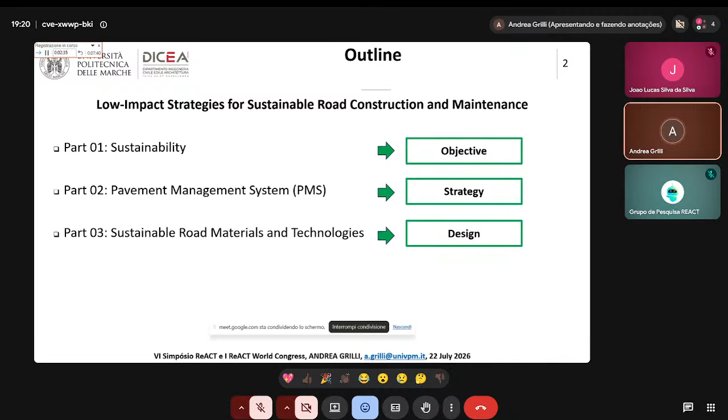Management system is the container, and sustainable materials and technologies are the tools inside the container.

So let's start from part one on sustainability. I will introduce the general context, then move to guiding principles. We will talk about sustainability from the definition to limits, dimension, culture, the ONU Agenda 2030, which contains the most important concepts for human beings and for our planet.

Afterward, we will see policy frameworks and procurement, talking about the Paris Agreement in 2015, and then in detail what is going on in Europe, in Italy, as a case study, because that is the situation I know best.

Before addressing sustainability in road materials, we should acknowledge that complex problems rarely have a simple solution. Apparent simplicity is often the result of an incomplete understanding of the variables, the interaction constraints, the long-term consequences. Simplified and easy solutions can be misleading, especially when they ignore the structure and dynamics of the system. Therefore, our goal is to understand the complex situation to make responsible and technically good decisions.

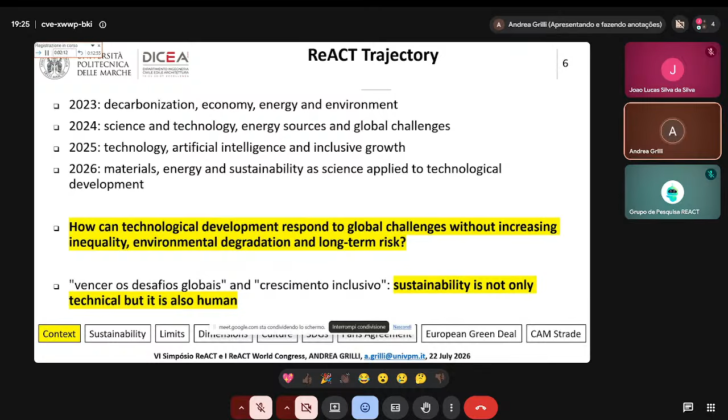Considering a more technical approach, we can update this definition, and I will formulate it in this way: sustainability is the ability to make progress last without exporting unacceptable ecological and social costs to the future, to other places, and to more vulnerable people.

We must realize that nature is a system of interconnected components and cycles. They are in equilibrium, but just a small change can produce strong responses, and we cannot disturb this equilibrium. So human activities take place within biophysical boundaries that control climate stability, biodiversity, land use, water, and air quality. The scientific evidence shows us that human development is pressing against ecological and climatic limits.

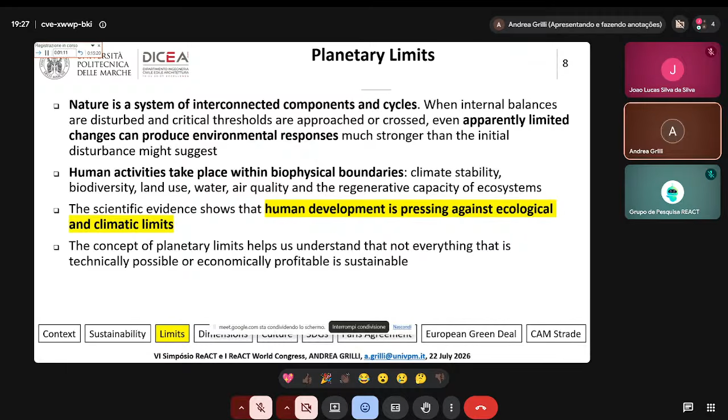From here, the concept of planetary limits helps us understand that not everything that is technically possible or economically profitable is also sustainable.

Traditionally, we often describe sustainability through three dimensions: environment, society, and economy. The environmental dimension defines the limits within which human activity must operate. The social dimension reminds us that development must serve people, improve quality of life, reduce vulnerability, and promote inclusion. The economic dimension is essential and means using resources efficiently over time and avoiding the transfer of hidden costs to the future.

Therefore, sustainability is a decision framework with three main pillars. Sustainability can write the criteria to select specific projects and research.

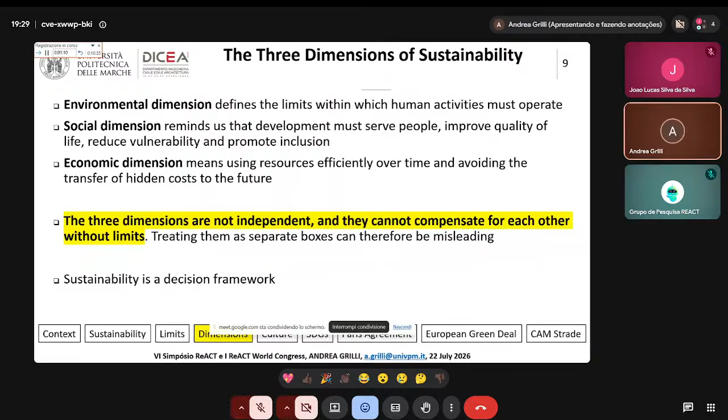We can also try to understand the relationship between sustainability, society, and economy. They can be organized in different ways. We can distinguish two different main logics. The first: the economy drives sustainability. A low impact solution spreads when it becomes profitable, efficient, and competitive.

In the second, sustainability guides the economy. An informed society defines an environmental objective and then uses regulation, procurement, and economic instruments to make that objective viable in the market. This is why sustainability is also a cultural and educational issue. Only a society, and the society I include engineer, designer, student, researcher, industry, only a society able to understand long-term consequences can orient economic tools toward public value.

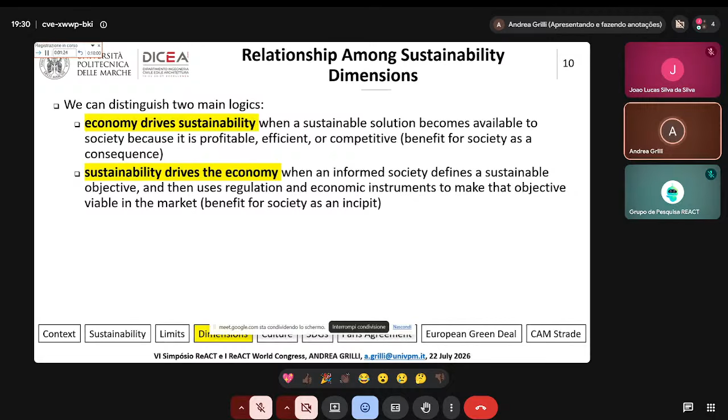Sustainability as culture and education. Technology is necessary, of course, but it is not enough. A society does not become sustainable simply by adopting more efficient machines or new materials. A society becomes sustainable when people understand sustainability as a shared responsibility, when designers, companies, and universities are expected to consider the long-term consequences of their decisions over time, across territories, and for people.

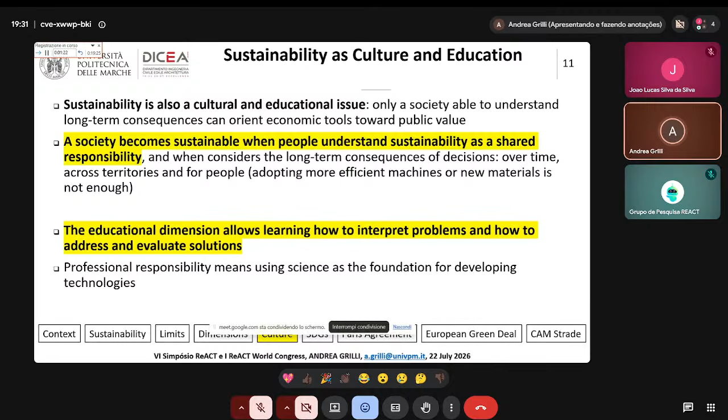This education dimension is especially important in this context, in a congress like ReACT, because many participants are students and young researchers. We are not only learning techniques, we are learning how to interpret problems and how to address and evaluate solutions. We are learning what kind of professional responsibility belongs to science and technology.

In this context, we can talk about the United Nations Sustainable Development Goals. The development goals, adopted in 2015, provide a universal and integrated framework for strategic and political planning. They bring together the economic, social, and environmental dimensions of development, and they offer a common language for governments, institutions, companies, and society.

Really, this process started in 1992 with the Earth Summit in Rio de Janeiro, Brazil. The 2030 UN agenda influences national policies because it provides a common language, a structure of goals, a system of indicators, and a mechanism for international reporting. However, the sustainability development goals do not define technical standards, so they are not mandatory. They give us the direction.

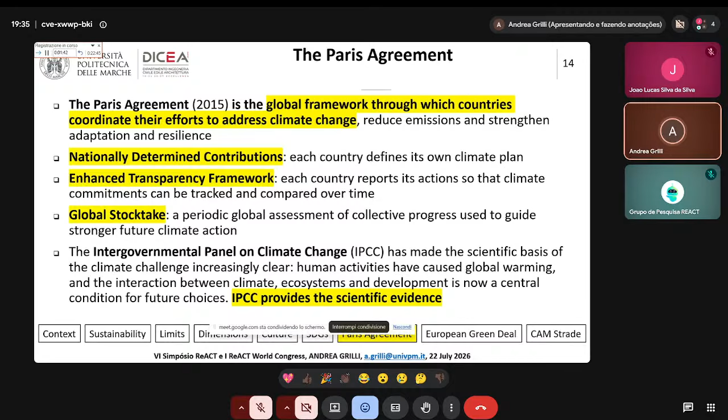Let me now move from the global framework to the European interpretation, because it is a useful example of how sustainability is moving from principle to procedure. The European Green Deal defines sustainability as a new growth strategy, an economy that is modern, resource efficient, with no net greenhouse gas emissions by 2050. The European Climate Law makes climate neutrality a binding objective for the European Union and for the member states. Sustainability becomes, therefore, part of how infrastructure is selected, financed, and evaluated.

In Italy, one example of this operational shift is represented by the Italian minimum environmental criteria on road infrastructure. We call it 'criteri ambientali minimi strade', the Italian minimum environmental criteria for road infrastructure. This is the implementation of the European Green Deal in Italy, and this regulation transforms principle into practice.

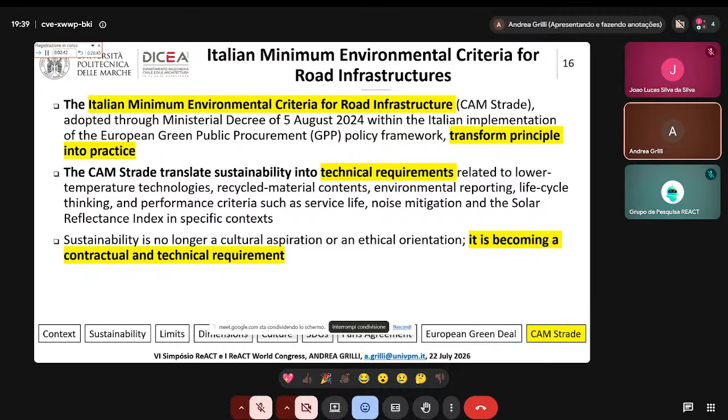About the recycled material, in the past we had a maximum amount to respect, so the regulation told us no more than, for instance, 20% of recycled material. Nowadays, with the CAM strade, the Italian minimum environmental criteria, the regulation is exactly the opposite: the asphalt concrete must contain at least a certain amount of recycled material, for instance 15% for the wearing course, 25% for the binder course, and 35% for the base course. So the approach is completely changed.

However, our work is not yet complete. I think we are on the good way, but our work is not yet complete, as several aspects still require further consolidation before they become common practice. We need to wait a gradual transition because the road industry sometimes adopts a conservative approach. We still need technical specification and design procedures that can fit better to the new material and to the sustainability concept.

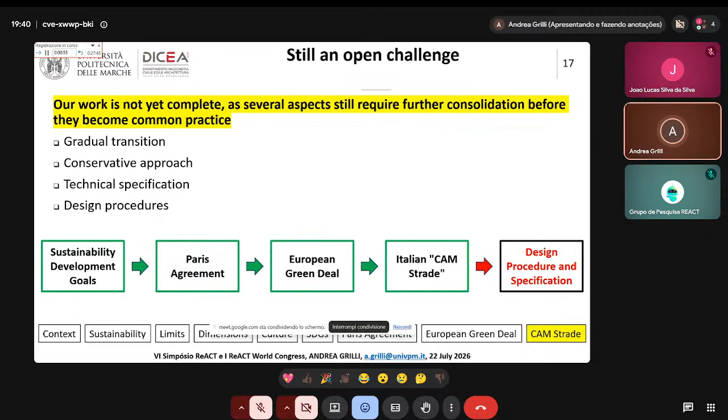However, we are on the good path. The conclusion of this first part: sustainability is a decision framework that helps us decide which alternative provides the best balance between technical performance, environmental impact, cost, and social benefits in the short and long term.

In general, the Sustainable Development Goals provide the development compass. The Paris Agreement provides the climate commitment. The Intergovernmental Panel on Climate Change provides the scientific evidence, and national laws, design procedures, and specifications must transform this principle into action.

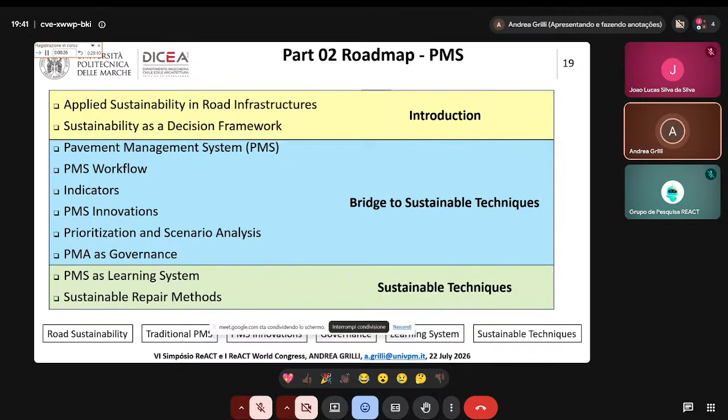So we can move right now to the second part of my lecture. Now we are going to transfer the general concept about sustainability into the infrastructure context. We will talk about technical tools to manage decisions for road pavement, which is the bridge to the application of sustainable techniques.

According to the IPCC, greenhouse gas emissions increased by 70% between 1970 and 2004. The average annual emission in 2010-2019 was higher than in any previous decade, and transport is one of the major contributors to climate change.

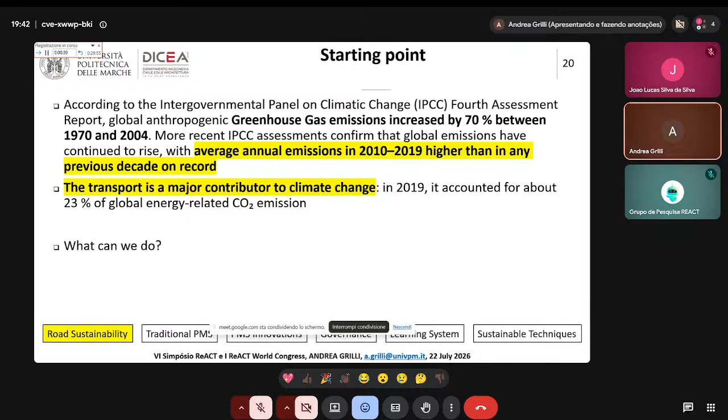So what can we do? Road consists of material, building, requires energy, transports people, connects people. They are part of the territory and they are expected to last. Therefore, road infrastructure is one of the most concrete places where material, energy, and sustainability are tested every day.

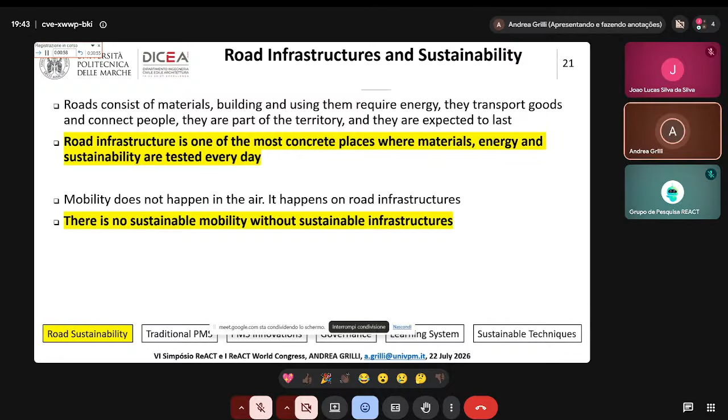Generally, we talk about sustainable mobility. We associate it mainly with vehicles, electric cars, alternative fuel, transportation. However, mobility does not happen in the air, it happens on infrastructure. Therefore, there cannot be sustainable mobility without sustainable infrastructure.

For asphalt pavements, sustainability should be interpreted as a measurable balance between performance and impact along the service life. So, performance and impact along the service life. We need a system that makes sustainability continuous, measurable, and operational. We have to transform sustainability from the general principle into a continuous practice of infrastructure management.

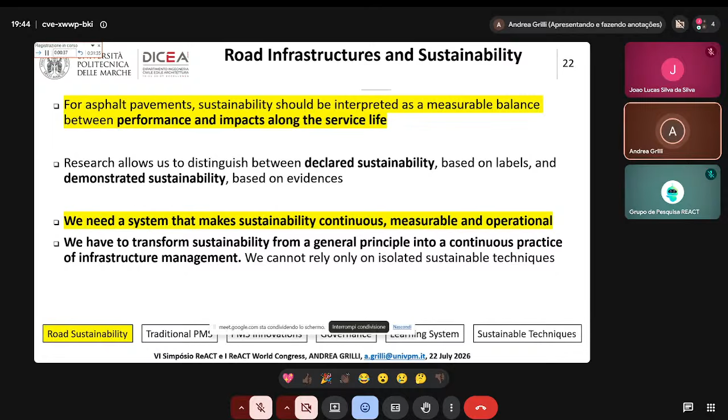Technology must be inserted into a broader strategy, because they become truly transformative only when they are embedded in a decision system. So technology should not be interpreted as an isolated solution. And I invite you, do not think in terms of one-to-one substitution in a project, as sustainability does not mean replacing a traditional technology with a sustainable one, or at least is not only that, it is changing the design approach.

So for this reason, I can explain the title of this lecture. Low impact strategy means a coordinated set of choices to reduce the overall impact of infrastructure. Sustainable road construction includes materials, of course, but also service life, and therefore the future impacts are already decided during the construction. And then maintenance. Maintenance is the way sustainability is preserved over time.

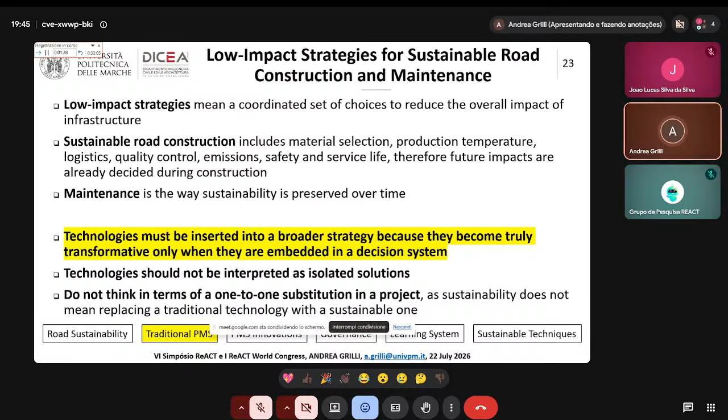A pavement management system is really a container of a set of tools, technology, and methods, and the management system can assist decision makers in finding the optimal strategy for maintaining pavement in a good service condition over a given period.

The most important word is system. System means a rational connection of coherent actions, data flows, responsibilities, and decisions. So management of a road network is not only maintenance, it is creating a system.

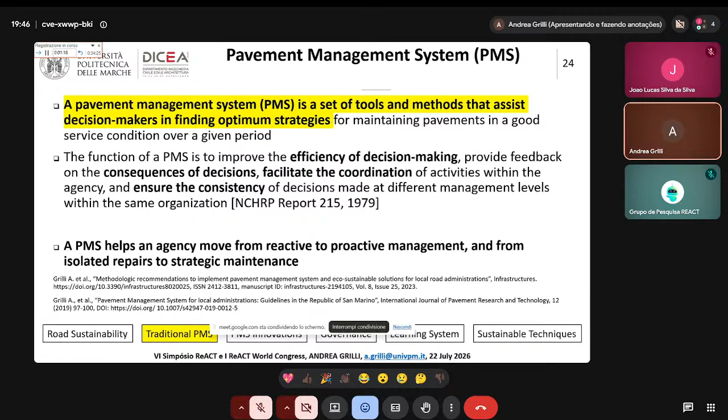A PMS, pavement management system, helps the road agency move from reactive to proactive management and from isolated repairs to strategic maintenance.

How can we demonstrate that a pavement management system is useful? I tell you, a pavement management system is useful because it helps answer the fundamental question on pavement management. So why should we prefer a specific strategy? The objective must be explicit.

So the motivation: when should maintenance be performed? The right time is very important. The right time is when maintenance produces the highest value or keeps the highest value over time. So that leads us to think about reactive and proactive approaches.

Where should maintenance be performed? The worst pavement is not automatically the first priority. It depends on several parameters, for instance the traffic volume. Therefore, priority: the agency must fix the criteria to identify the priorities in the road network. And then the road agency can also evaluate several different scenarios and decide the best one.

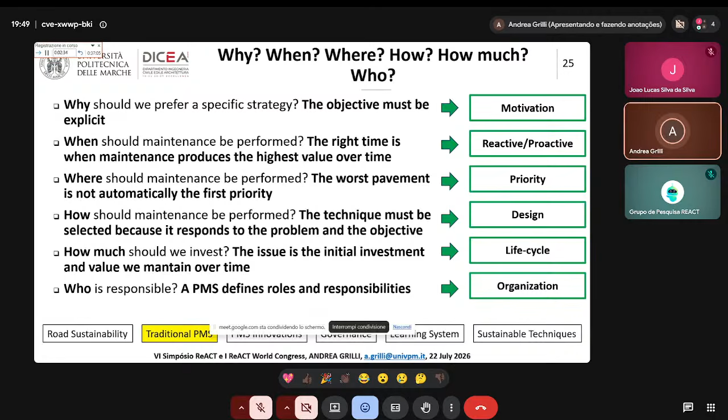The pavement management system workflow didn't change over time, is stable over time. So there are several functional phases: gather information, define the priorities, select the type of maintenance, elaborate the maintenance planning, and then the application. And then once again, we can get new data and implement the informative database.

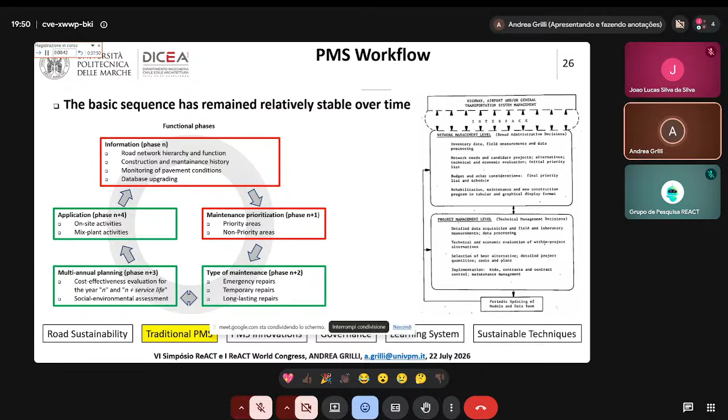The PMS works in two levels. The network level is where key administrative decisions influencing the overall road network are made, and the project level is where technical decisions are made for a specific area. The two levels must communicate because a project is one decision inside a network strategy.

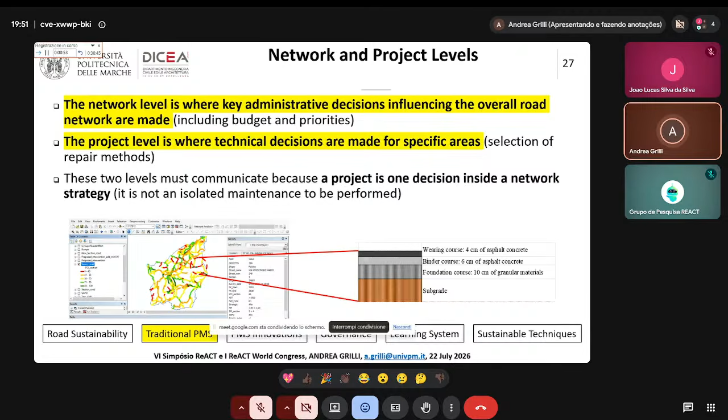And in this figure, you can see just an example. On the left, the condition of the network. On the right, a specific design for a specific road inside the network. Particularly, this is the network of the Republic of San Marino.

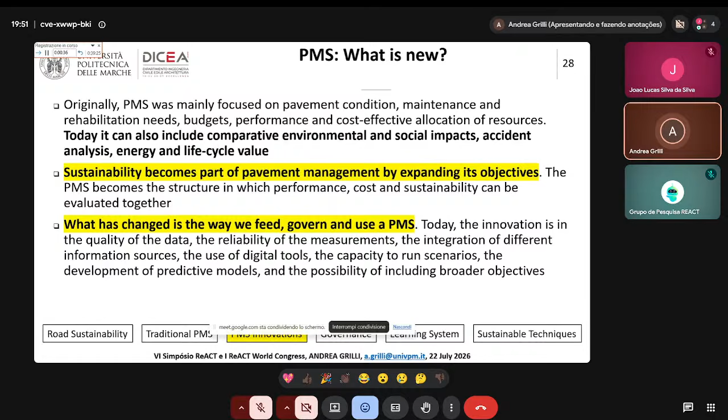Originally, pavement management system was mainly focused on pavement condition, maintenance, budget. Today, it can also include comparative environmental social impact, accident analysis, energy life cycle value. Therefore, sustainability becomes part of the pavement management by expanding its objective. What has changed is the way we feed, govern, and use the pavement management system.

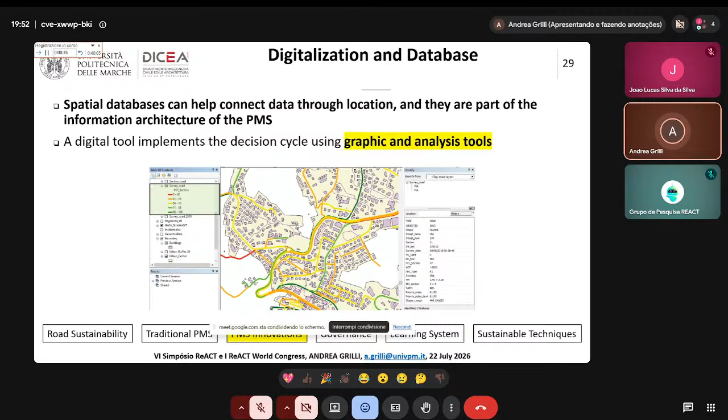Spatial databases can help connect data through location, and they are part of the information architecture of the pavement management system. The digital tool implements this decision cycle using graphic and analysis tools. The graphical tools help us to understand, to explain some specific strategies and decisions.

The best PMS is the one that the agency can maintain, update, and use year after year. Of course, a motorway agency can use a more sophisticated management system. However, also a local agency must use a pavement management system to organize their activity. They just must use a tailored management system, but they must use a system.

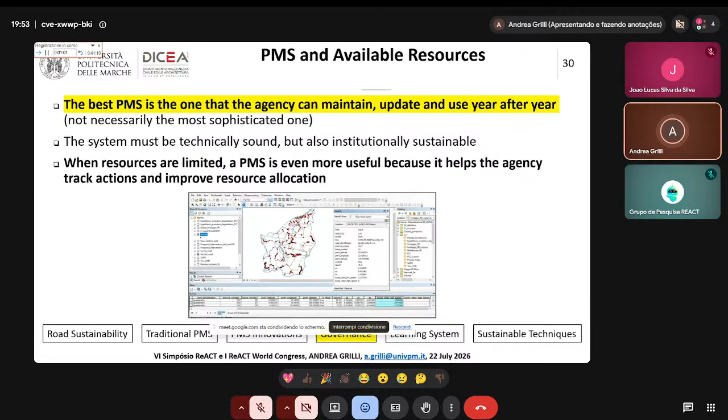A system must be technically sound and sustainable. When resources are limited, the pavement management system is even more useful because it helps to optimize the expenses, it helps the agency track actions and improve resource allocation. The objective is also to create a better interface between technical rationality and decision making.

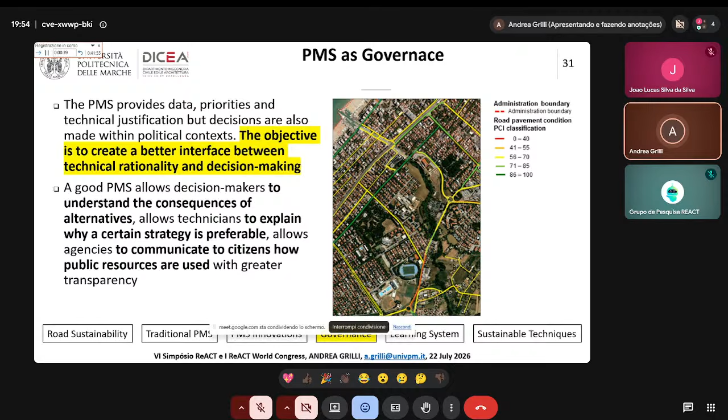A good PMS allows decision makers to understand the consequences of alternatives, allows technicians to explain why a certain strategy is preferable, allows agencies to communicate to citizens how public resources are used with greater transparency.

The application of sustainable technology together with performance evaluation monitoring generates knowledge. A successful application can lead to informed replication, while a bad one provides a clear understanding of the causes of failure. So when we start learning from the information gathered, we improve the method, moving from a reactive approach to a more proactive and efficient one.

The PMS changes what happens even after the repair or the emergency. Even an emergency becomes information, and it is the first step toward management.

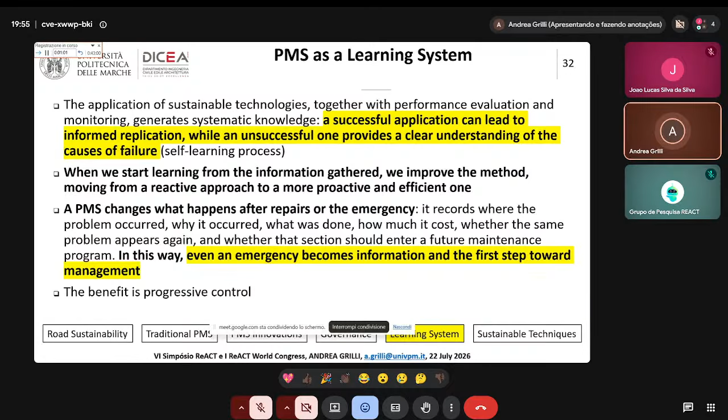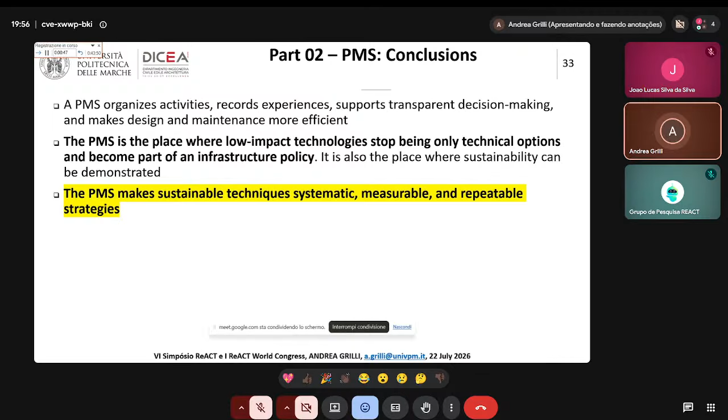So we can go to the conclusion of the second part. The pavement management system organizes activities, records experience, supports transparent decision making, and makes design and maintenance more efficient. The pavement management system is the place where low impact technology stops being only technical options and becomes part of the infrastructure policy. It is also the place where sustainability can be demonstrated. Pavement management system makes sustainable techniques systematic, measurable, and repeatable strategies.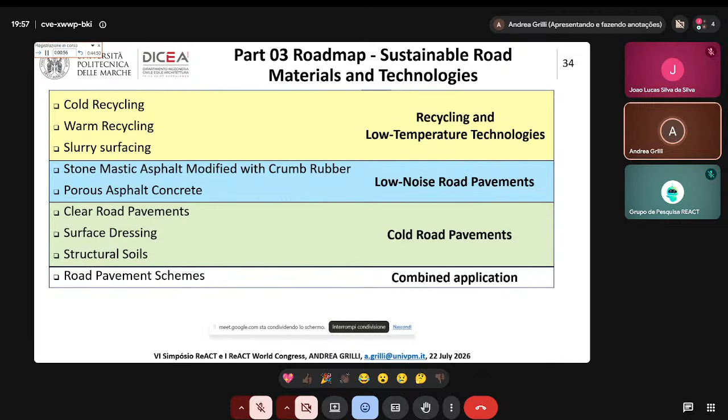So now we can move to the third part of my lecture. Now that we know how a management system works, we can talk about techniques. I divided them into three main categories: recycling and low temperature technologies, low noise road pavement, and cold road pavements. However, we are ambitious, and a single technology is not enough for us. So we aim to integrate them. Therefore, we will end the analysis combining several applications in road pavement schemes.

So about recycling, a low temperature technology, we can distinguish cold recycling, particularly cold central plant recycling. The mixtures are produced in a mix plant. Cold in-place recycling involves only asphalt concrete. Full depth reclamation - in this case, the recycling process involves asphalt concrete and the granular material used as a foundation layer.

And then we have warm recycling. So we can produce recycled asphalt concrete at lower temperature. We can reduce the temperature between 20 and 40 degrees. Therefore, from about 160 or 180, we can reduce to 120, 140.

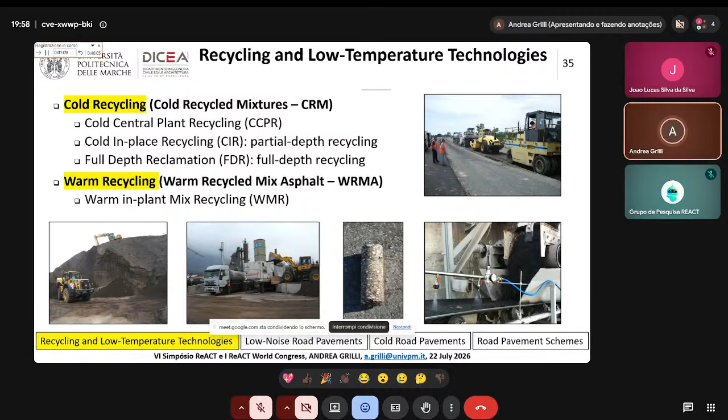We can compare the different techniques. There is not one technique absolutely better than another. It depends on the context of the project.

Of course, cold recycling does not need a heating system, so we work at ambient temperature. We can use up to 100% of reclaimed asphalt or recycled aggregate. Using the technique in the field, we also avoid transportation, and we can get fair performance.

Of course, if we produce the mixture in a mixing plant, we can get higher performance because we can control exactly the production. Warm mix asphalt uses temperatures ranging between 120 and 140. Generally, in Italy, we use no more than 50% recycled asphalt, but we can reach very, very good performance.

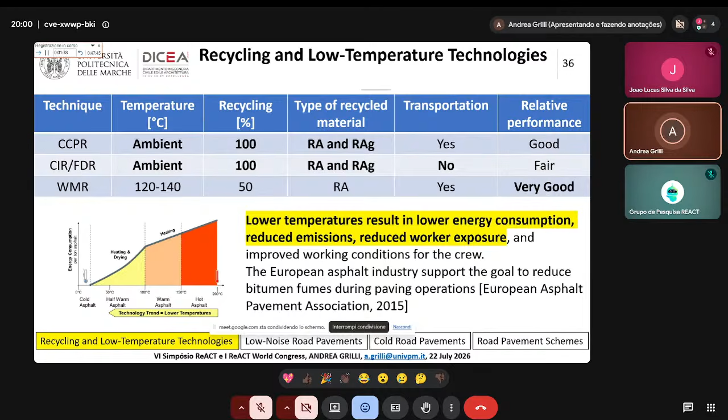Lower temperature results in lower energy consumption, reduced emissions, reduced worker exposure, and improving also the working conditions for the crew.

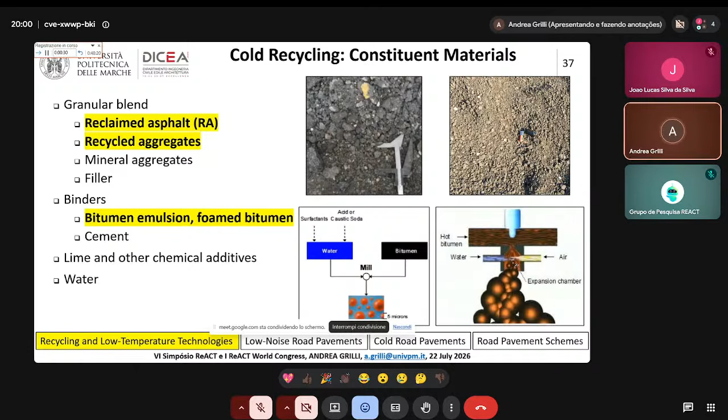The constituent materials are reclaimed asphalt and recycled aggregate, but the key is the binder. We use bituminous emulsion and foam bitumen. These two materials allow us to reduce the viscosity of the binder at ambient temperature, so we can produce the mixture using cold and wet aggregate.

I'll skip some slides to stay on time for the end of the presentation. This slide shows the conceptual composition of pavement mixtures. On the y-axis is the cement dosage, and on the x-axis the bitumen dosage.

We can find in the central part of this figure the cold recycled mixtures. They can use 100% recycled materials and require no heating.

We can distinguish cement-bitumen treated material. These mixtures are the most used in Italy, and the idea of this material starts from cement treated material, with the aim to reduce the brittle behavior of cement treated material by introducing bitumen.

And then you can see also the bitumen stabilized material. This kind of mixture is probably the most used in Brazil, and the idea behind BSM is to improve the shear properties of an unbound mixture.

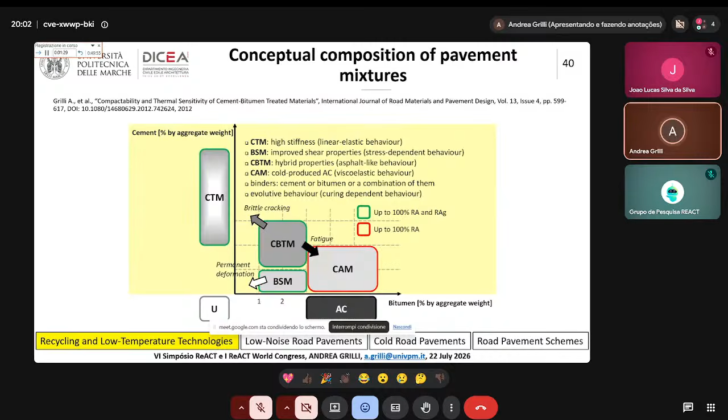I am also the co-leader of an international group, RILEM Task Group 1, on performance-based evaluation of cold recycled asphalt mixtures. We just concluded, a few months ago, a critical review.

This review was from colleagues in the group, comparing the state of the art of cold recycling in our countries: Italy, Canada, Brazil, Poland, and USA.

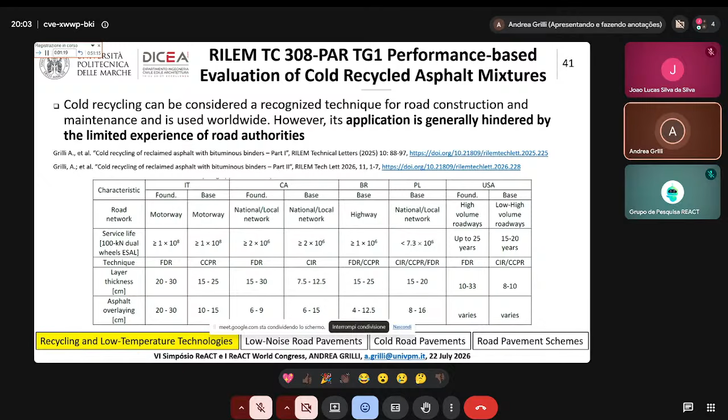We concluded that cold recycling can generally be considered a recognized technique for road construction and maintenance, and is used worldwide. However, its application is generally hindered by limited experience of road authorities. So researchers in this field must help road authorities implement these techniques.

A distinctive feature of cold recycled mixtures is the requirement of a certain curing period to develop mechanical properties, strength, and stiffness. The curing process is influenced by material-related factors, construction-related factors, and environmental-related factors. Therefore, it is absolutely not an easy task.

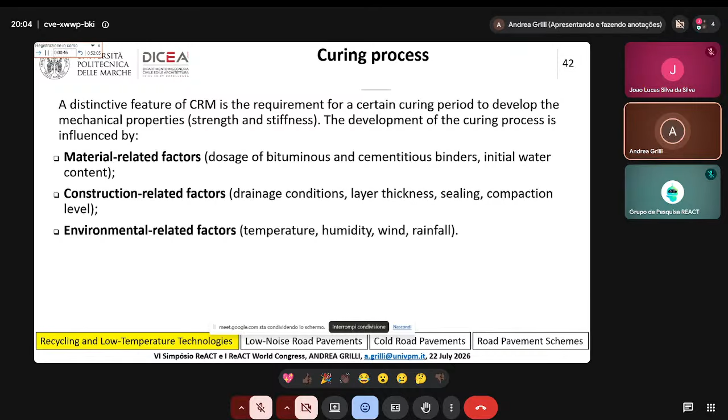When bituminous and cementitious binders are employed, the curing process results from different mechanisms that involve emulsion breaking, moisture loss, and hydration of cementitious compounds. These three mechanisms occur at the same time with different weight, and they change their influence over time, tightly related to one another.

Moisture loss ensures bitumen setting and bonding between the bituminous mortar and coarse aggregate skeleton. Hydration of cement chemically changes the pH, accelerates emulsion breaking, and absorbs water, reducing the free water. Hydration requires water, and bitumen can contain hydration products, so all these mechanisms happen together.

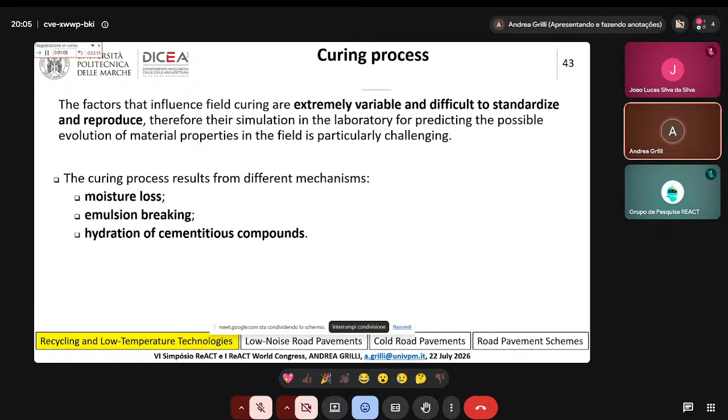In this figure, you can see the mechanism of what happens during curing. After mixing, the mixture is composed of aggregate, water, bitumen particles, and cement. Aggregate and cement particles, shown on the left, are wet with water, and there is no contact between aggregate and bitumen particles.

But then, at low relative humidity, drying starts. The evaporation rate depends on several factors. When drying starts, the distance between bitumen particles decreases, and flocculation and coalescence begin. The emulsion breaks and bitumen setting starts.

Bitumen takes the place of water, as shown in the second figure, and mechanical performance improves because bitumen replaces water between the aggregate. For lower moisture content, the radius of the connected water skin decreases and matric suction increases. There was an interesting study developed in São Paulo, Brazil, that investigated this matric suction.

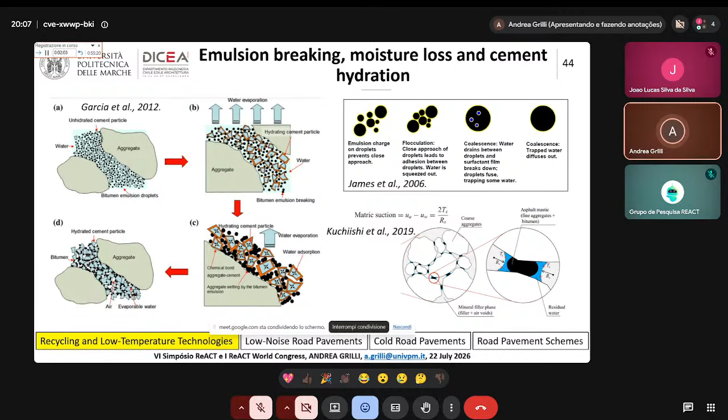From this figure, you can understand the evolutive mechanical behavior of cold recycled mixture. We can assert that stiffness increases as curing time increases, and the higher the curing temperature, the higher the stiffness rate. The red line represents specimens cured at 40 degrees, and you can compare it with the green line, which represents specimens cured at 20 degrees. So you can see different curing rates.

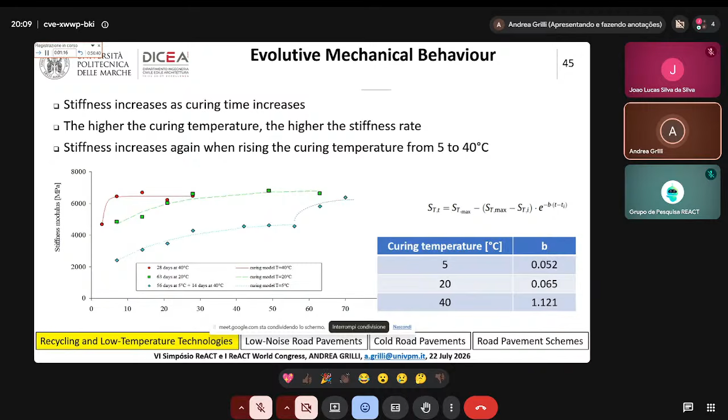The blue line represents specimens at 5 degrees. But after a certain time, more than 50 days, we increase the temperature from 5 to 40 degrees, and the stiffness starts increasing once again. So the evolution depends on temperature and on water evaporation.

Another specific characteristic of cold recycled mixture is temperature sensitivity. Thermal sensitivity increases with increasing reclaimed asphalt content and decreasing cement dosage. So cement inhibits the thermal sensitivity.

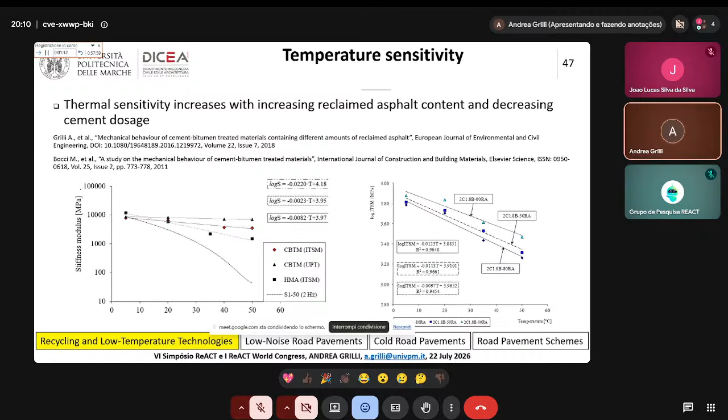However, in the first figure, we can compare the cement bitumen treated material, using bitumen and cement, with a traditional asphalt concrete. We can see that the temperature sensitivity of cement bitumen treated material is really lower than that of asphalt concrete. This can really be an advantage if we think about climatic change and the higher temperatures that we experience right now during this period.

Another important task for cold recycling is applying a volumetric approach for the mix design. During the mix design, we can measure the voids filled with liquid. In this way, we can monitor the degree of saturation of the mixture. Water is very important because it facilitates the compactability of the mixture, but we must control the degree of saturation.

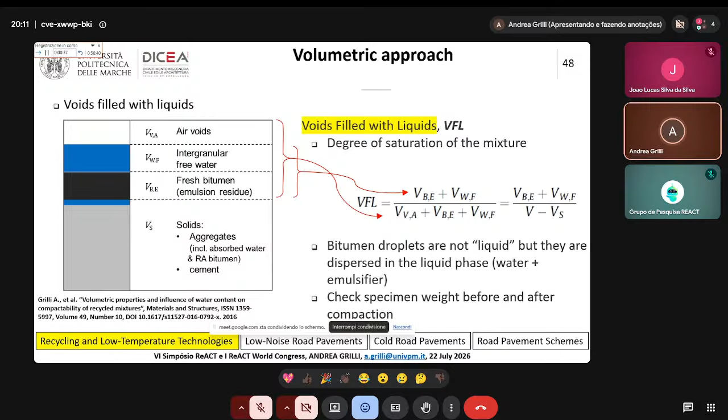Then we must also measure the voids in the mixture, because the volume of air and the volume of water influence the mechanical response of the material. So we must control the non-structural part.

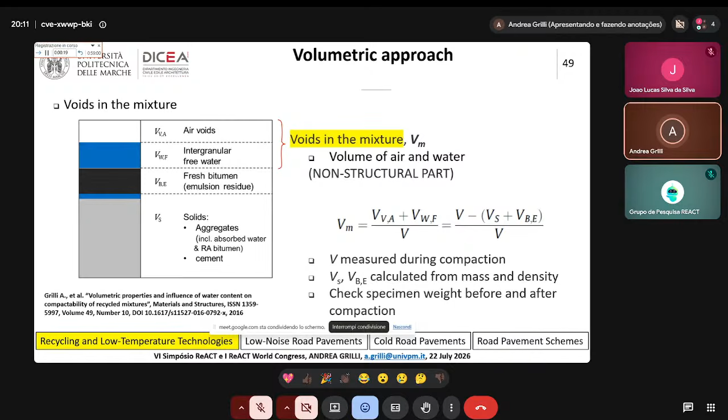From this slide, you can see clearly the evolution of air voids during compaction. The blue curve shows air voids reducing as compaction increases. The red arrow, the other curve, represents the voids filled with liquid, and we can see that the saturation level increases as compaction increases.

When voids filled by liquid approach about 85%, water and fines start flowing out of the mold, so we cannot reach this value of saturation in the field. So we can use these results to fix the optimum value of water content.

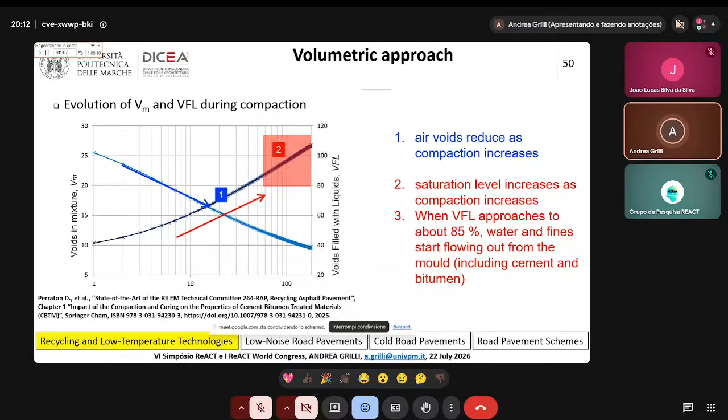As I told you, air voids influence the mechanical properties. The stiffness modulus can be considered linearly dependent on air voids at all curing conditions. A 1% increase in air voids leads to a reduction of stiffness modulus of about 900 megapascal. That's about 10%, so a lot.

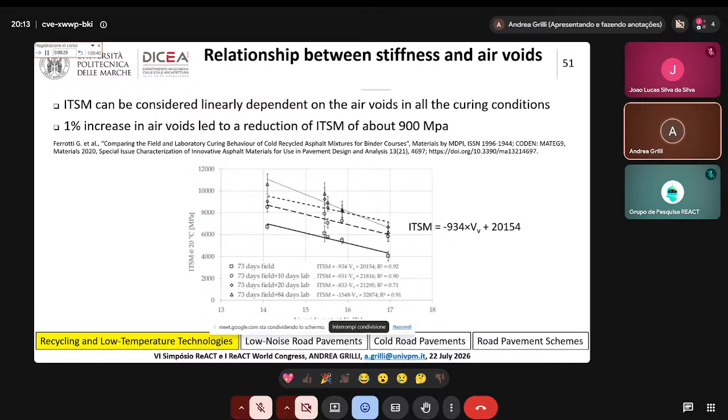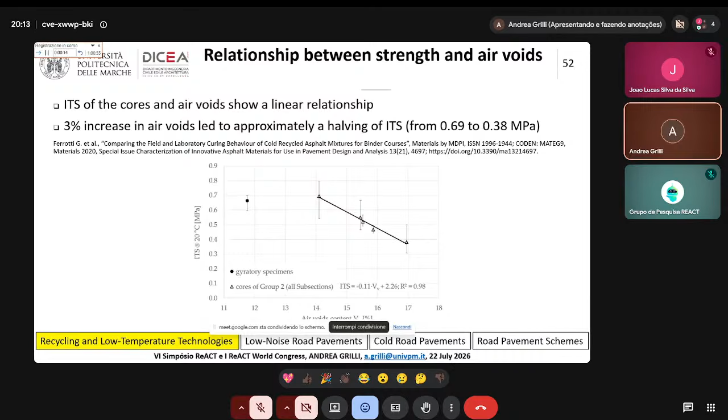Even more if we talk about strength. The strength versus air voids show a linear relationship. A 3% increase in air voids leads to approximately a halving of strength.

Now we can move to the second material, warm mix asphalt. We don't have so much time, so I'll try to be fast. We can use three methods to produce warm mix asphalt.

The first method uses temporary modification of the physical state of the binder, so water is used to temporarily reduce the apparent viscosity of the binder. The second method considers modification of the rheological properties of the binder, typically using organic additives, synthetic wax, or viscosity modifiers, vegetal oil, and so on. The third method considers modification of binder-aggregate interaction, typically using chemical additive surfactants.

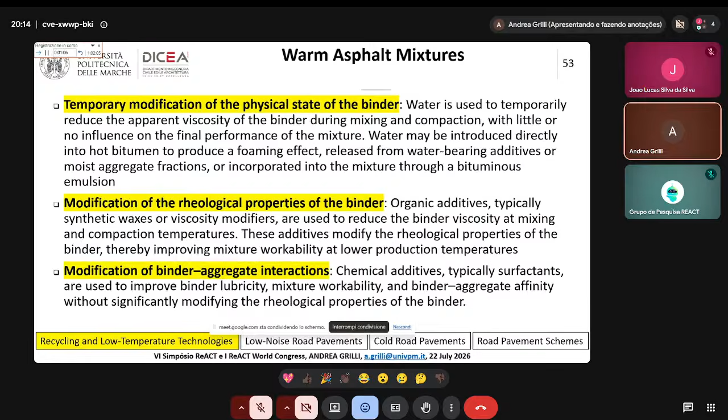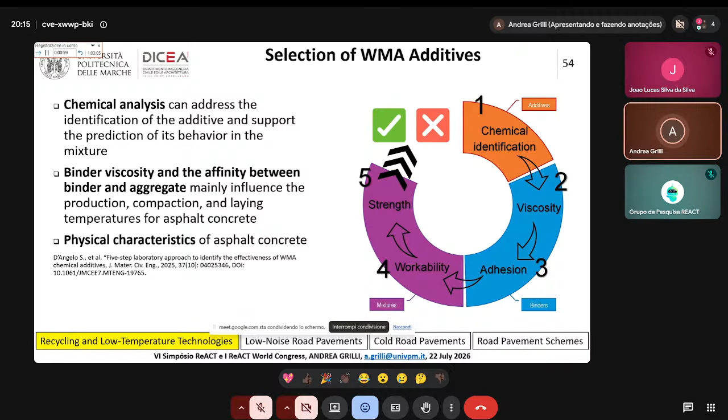We proposed a protocol to study warm mix asphalt additives, and the study starts with the chemical identification of the additive. Chemical analysis can address the identification of the additive and support the prediction of its behavior in the mixture. Then the second step, we can measure the viscosity, the effect of the additive on bitumen viscosity. Then the third step, we can check the adhesion, the affinity between binder and aggregate. Finally, we can investigate the workability and strength of the asphalt concrete.

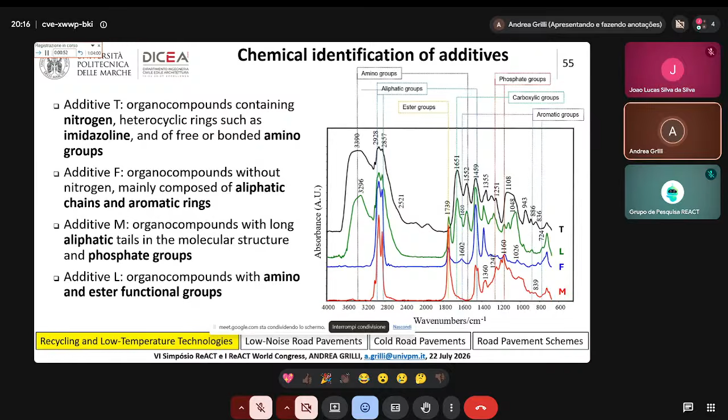In this slide, I just show you an example of chemical identification of additives. I am a road engineer, so I have colleagues from the chemical department who did a lot of tests on that, and we identified several families or categories of additives, specifically containing nitrogen, imidazoline, amino groups, or aliphatic chains and aromatic rings, aliphatic groups or phosphate groups, and other additives with amino and ester functional groups.

They are similar but work in different ways, and we tested a lot of additives in the bitumen and evaluated the effect on viscosity. For instance, additives M and F act as viscosity reducers, whereas additives T and L seem not to influence the viscosity behavior. However, additives L and T, which contain amines, reach good adhesion values. So the behavior is completely different between viscosity reducer and surfactant.

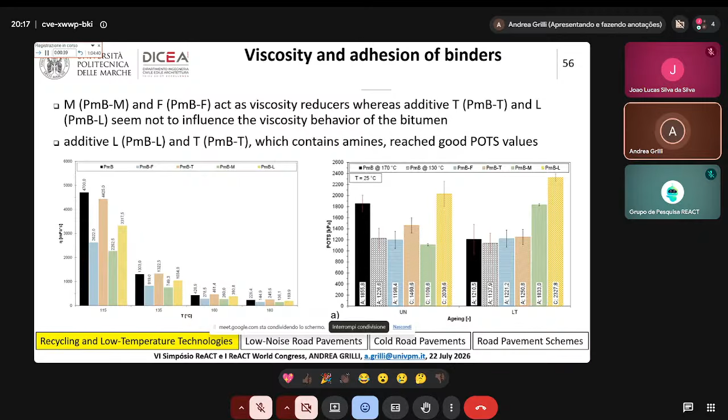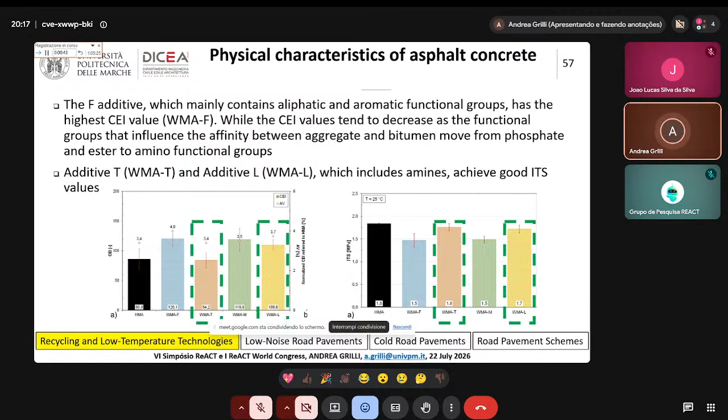We also investigated the workability and strength of the asphalt concrete, and found that the additive, which mainly contains aliphatic and aromatic functional groups, required higher compaction energy, while the compaction energy value tended to decrease as the functional group that influences the affinity between aggregate and bitumen moved from phosphate and ester to amino functional group. The additive which includes amine also achieved very good strength results.

One key important factor is the asphalt mix facility. If we want to increase the reclaimed asphalt content, we need to update the asphalt mix facility. We identify three main categories: batch plant with a parallel RAP drying drum.

We can reach 78% of reclaimed asphalt with this. Concentric double drum dryer, we can reach 50-60% of reclaimed asphalt. And dryer drum equipped with a recycling ring, which is the most used in Italy, can reach 40-50% of reclaimed asphalt.

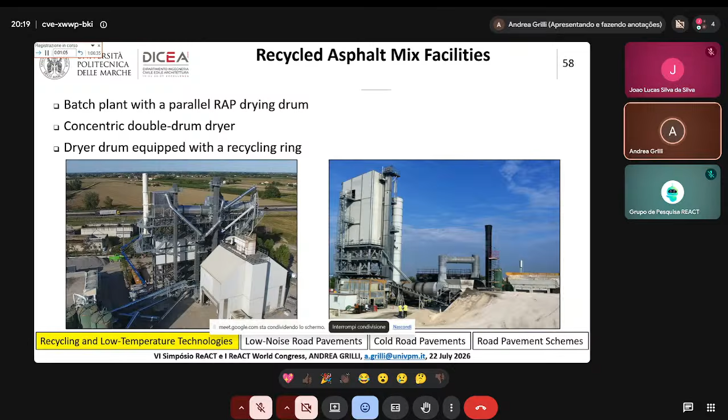This can be a solution in specific contexts when we don't want to heat the material.

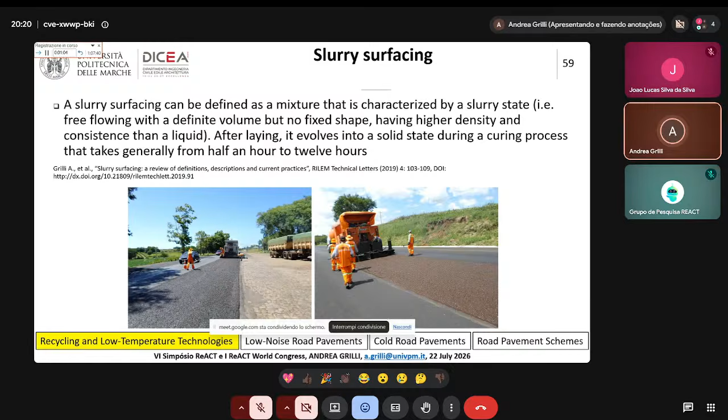We had experience talking about low noise road pavement. We designed a new generation of porous asphalt, including 15% of reclaimed asphalt, produced at a lower temperature of 120 degrees, so warm porous asphalt with reclaimed asphalt.

The target air voids was about 20%, and we also investigated different additives to improve the mechanical property.

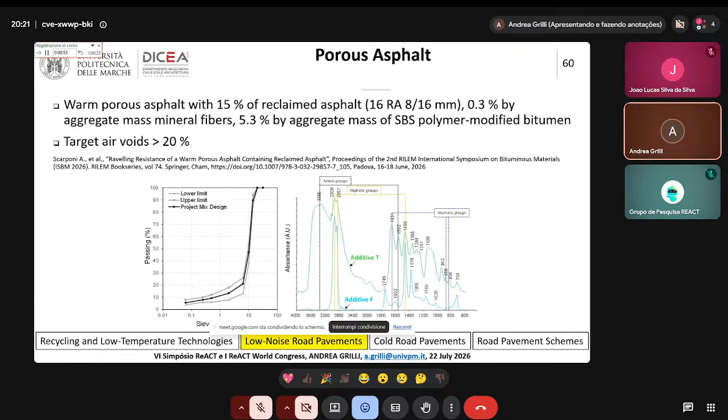You can see here an example of the infrared spectrum for additives. You can see amino groups, aliphatic and aromatic groups from different additives.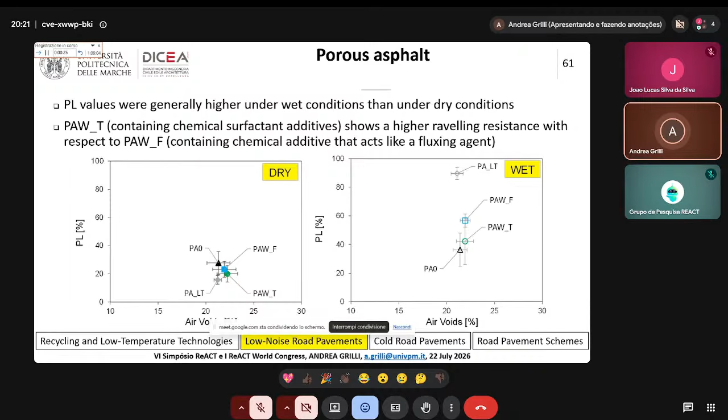We obtained good results on average in dry condition, but in wet condition, the action of water influences the performance a lot. We found that the additive containing chemical surfactant additive shows higher raveling resistance.

Talking about, once again, low noise road pavement, we can use stone mastic asphalt with crumb rubber. We use the dry method, so we can introduce crumb rubber directly in the mixer, in the mixing chamber. Generally, the amount ranges from 1 to 1.5% by mass of aggregate, and the expected tire road noise reduction is between 1 and 3 decibels.

On the left, you can see the grading envelope of the crumb rubber: 100% passing the 0.6 millimeter sieve, but the crumb rubber is almost all retained at the 0.075 sieve.

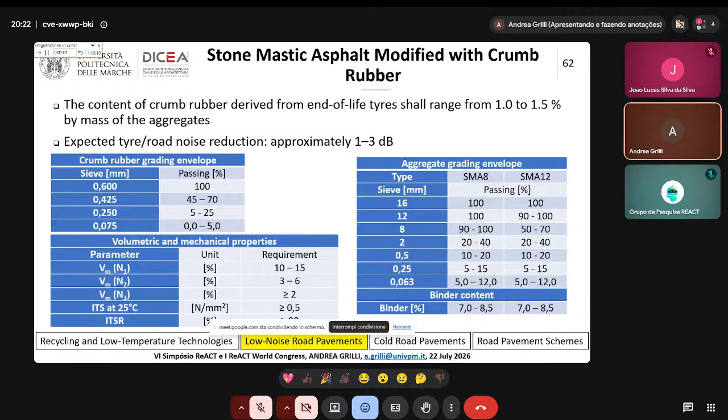Then talking about cold road pavement, we can select non-black pavement or clear pavement. There are several binders already available in the market, but while they look similar, they are very different in composition and mechanical behavior.

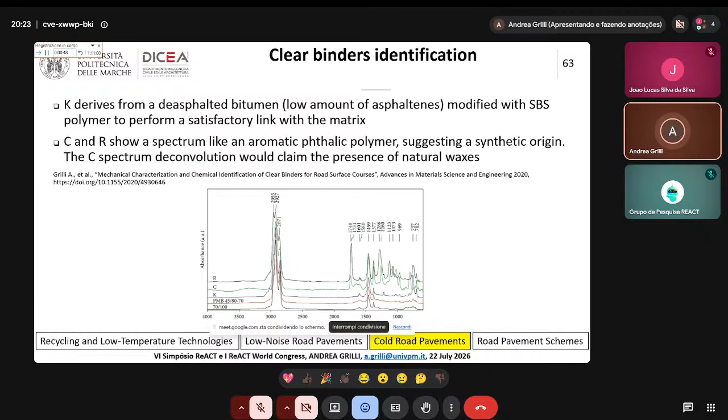Here you can see some examples: one with a low amount of asphaltene, modified with SBS polymer, and other binders show a spectrum like an aromatic polymer, suggesting a synthetic origin. Some contain natural waxes, and that generates, as you can see from this slide, completely different behavior.

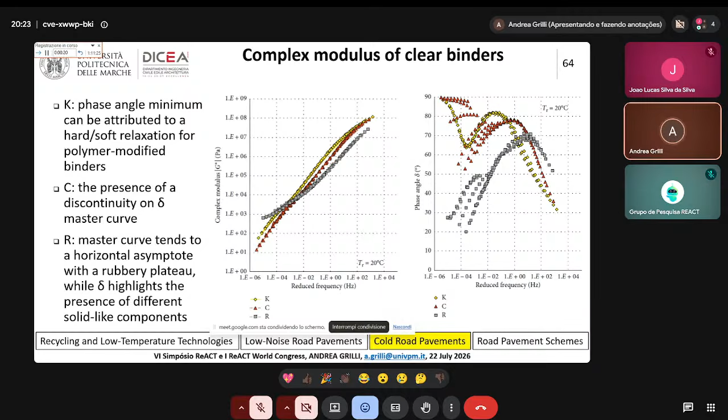You can see the complex modulus and the phase angle that describe the mechanical behavior of this binder at different loading frequencies.

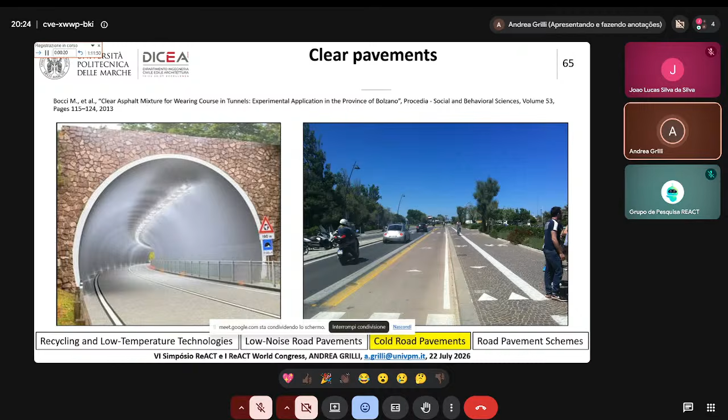You can see some application on the left in a tunnel to improve the lighting of the tunnel, the visibility, and on the right, the application for a bicycle lane to better distinguish the lane for the bicycle.

For the rural road, we can use surface dressing, at least one layer of binder and one layer of chipping, but typically we use a prime coat and then 3 layers of aggregate and 2 layers of binders.

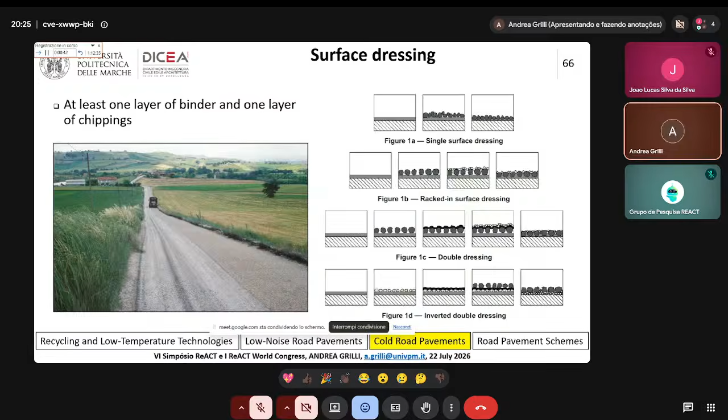You can see that with the pavement, we can harmonize the pavement and the road in the countryside using the natural color of the rock. And then the last proposed solution for urban areas is structural soil as the foundation of the road pavement. Structural soil consists of two complementary components: a rigid stone framework that provides the load-bearing capacity required for engineering application, and a soil matrix that supports root development and tree growth.

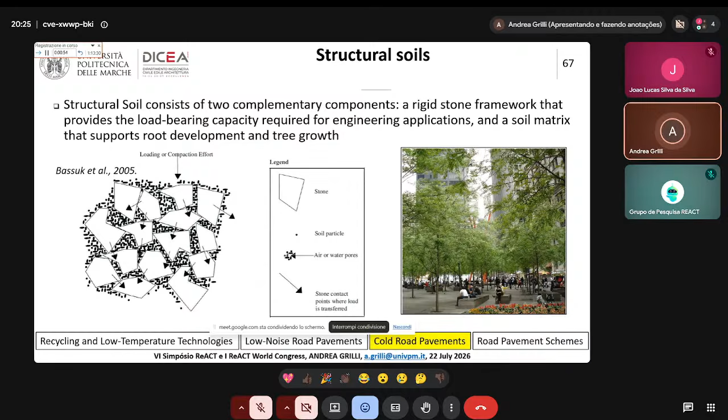This material is particularly useful in urban areas if you want to regenerate the natural context of a residential area.

However, as we said at the beginning, sustainable pavement is not a one-to-one substitution, one traditional for one sustainable, but is a new way to approach designing road pavement.

So there are a board of alternatives that we can combine and measure. Of course, we can select the best solution considering the performance, pavement design, and the life cycle assessment.

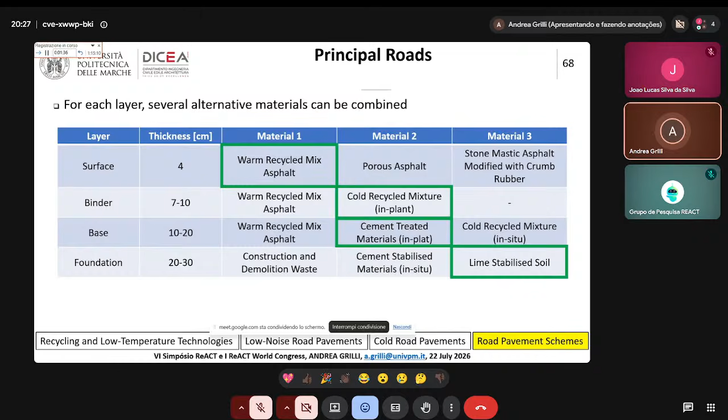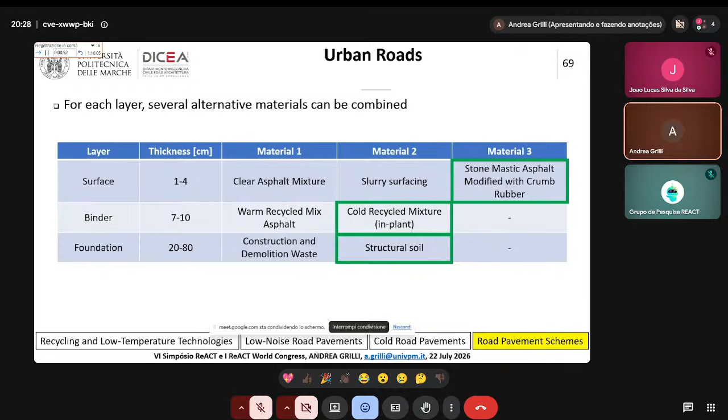For the binder course, we can use cold recycled mixture, and for the foundation, for instance, the structural soil, if we want to create also a green area close to the pavement with nature, with trees.

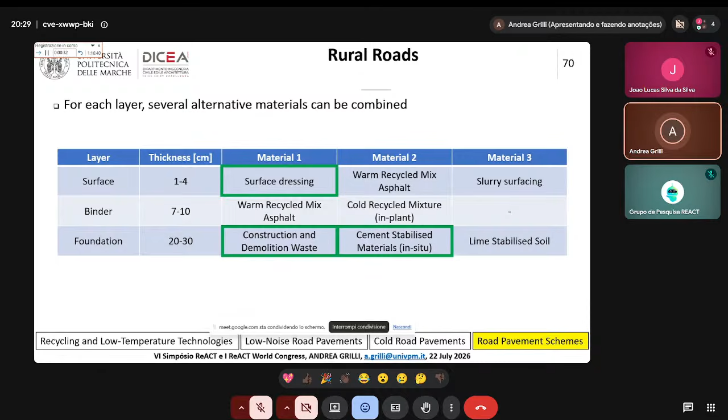So we have several options, several alternatives. We can draw different scenarios and we can decide the best project.

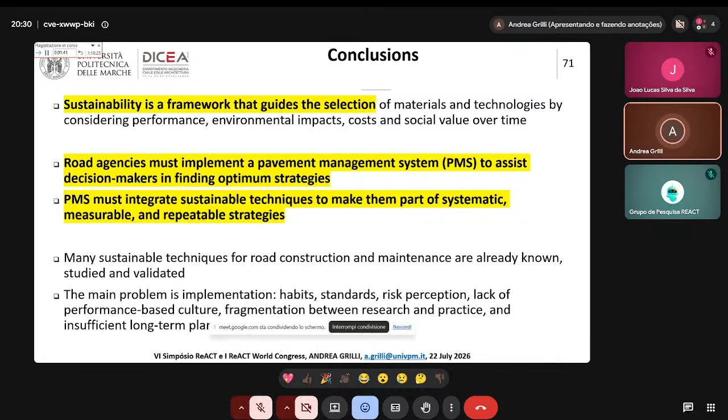So the research field must help and work with the public administration to improve this key point and to spread the sustainable technique. So, thank you for your attention.

Thank you, Andrea. Thank you. Thank you, Joao. Okay, very good. Good, I hope to respect the time. Of course, of course. It's very, we are in time. Okay, it's quite good. We just have to thank you very much for your comprehension about our links. Oh, it doesn't matter. Thank you. And as we had that little problem...